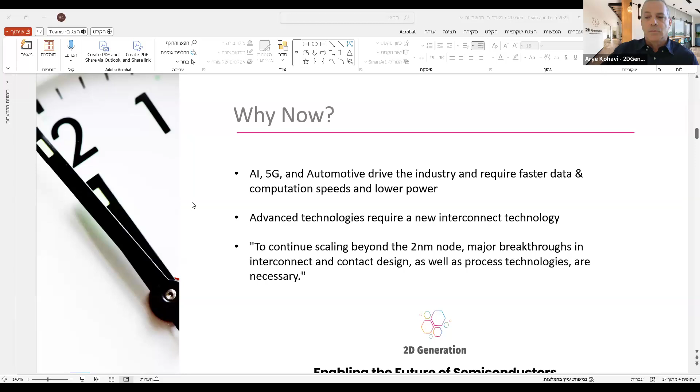Why does it matter? If the industry wants to go to advanced generation of AI, 5G, autonomous vehicles, it must solve the issue of interconnect. It's not our statement, it's a statement of the industry. In any conference in the world of semiconductor, you can hear that. This is a quote from Applied Materials: to continue scaling beyond the 2 nanometer node, major breakthroughs in interconnect are needed, as well as progress in technology. So this is where we are. You cannot go to iPhone 20 unless solving the issue of interconnect. You cannot go to the new chip of NVIDIA unless solving the issue of interconnect.

How do we do it? We decided to use a machine called ALD, atomic layer deposition, that exists in any fab in the world. In any fab in the world, you can find dozens of ALD machines. Right now they deposit metals. So we are the first and probably the only one in the world that decided to take this machine to grow graphene. How do we do it? We developed molecules that are almost graphene, and the ALD puts them on the surface, and you need lower temperature to connect them to each other and grow the graphene. This is our technology, patented in many patents.

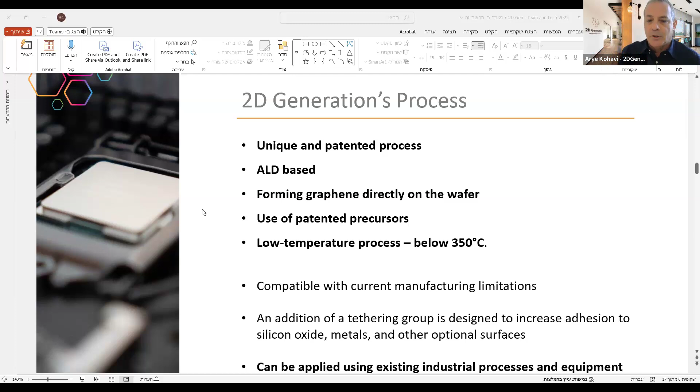So we form graphene directly on the wafer. We use a patented precursor, raw materials, and it's all a low temperature process below 350. It's compatible with the current manufacturing limitations, mainly temperature, but several more. And it can all be applied using existing industrial process and equipment. I will never design a new machine in my life. I did it several times. Here we use machines that already exist in any fab in the world.

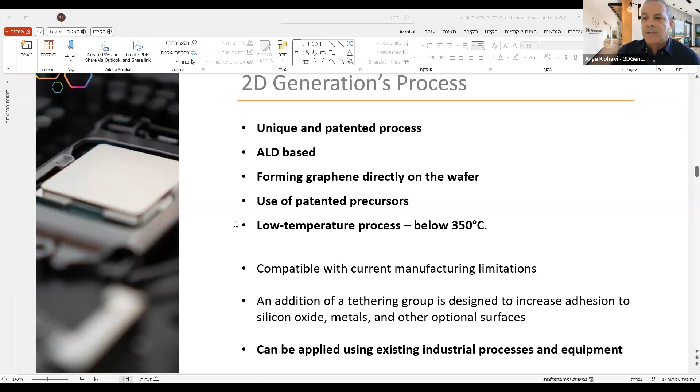As I told you, we have an agreement with IMEC. IMEC is a big organization, 5,000 researchers, and the discussion with them looks like a Benetton advertisement, people from all around the world, and they are the leaders in the semiconductor industry.

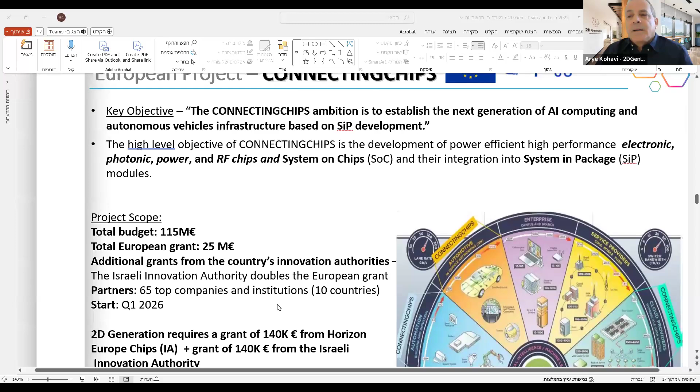Two last things, because I see that clock. One is that we were chosen for a European project called ConnectingChips. The mission is to design the next generation of AI computing and autonomous vehicle chips. Any project like that is like a speed dating when the big ones, meaning NVIDIA, Valeo, Fraunhofer, Applied Materials, sit and interview companies that can bring solutions, they define their gaps. One of their gaps was graphene, and then they interviewed all the companies and academies that try to show a solution, and they chose us to bring graphene to the project. It's a project that's going to start next year, but we were chosen to bring the graphene to this project.

Last thing, we have 4 patents. Each one of them covers a very wide area because we are the first and only in the world that uses ALD for graphene. We could submit a lot of patents around that.

So this is what we're doing. Last comment is that probably I'm going to arrive at Semicon Taiwan within a few weeks, so I can meet you there.

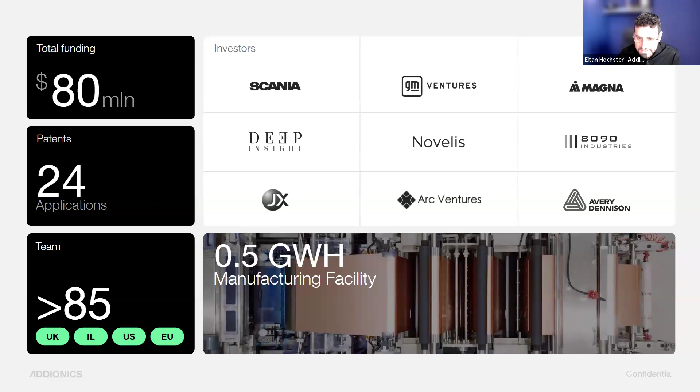So what is it exactly that we manufacture? We have a technology for manufacturing current collectors. Current collectors are a key component in the batteries. They are the metal substrate that holds the electrodes together. Today they're 2D foils. It's a standard commodity, something that's been overlooked. It hasn't changed in the last 30 years since the lithium-ion battery was invented. It's often known in academia that it's not optimized. There's a better way to make these current collectors that, if you can improve them, you can improve the whole battery because they influence the structure of the whole electrode.

People focus on the chemistry of the battery, but actually the physical structure of the battery has a lot of untapped potential for improving the battery. So what we have done is we've taken this concept, which was known in academia, and figured out a way to manufacture it at scale: a porous and three-dimensional current collector. So in every current collector, instead of being a flat piece of foil, it is three-dimensional and porous, meaning there's less copper and less aluminum than there normally is in every battery. And there's a more mechanically stable electrode because you have better structure and more surface area.

What this ends up happening is, one, it's cost effective. We can reduce the cost to cell manufacturers by up to 10% per kilowatt hour. We can make batteries that get rid of traditional trade-offs, where usually if you make a high energy dense battery, you're going to have lower cycle life, or if you make a high power battery, you're going to have worse energy density. We can reduce those trade-offs.

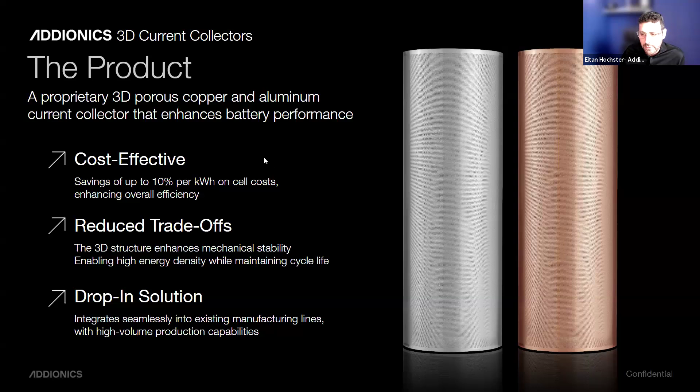And finally, and most importantly, it's a drop-in solution. We're taking something which is the backbone of the battery manufacturing process. A frequent question is, okay, if you drop in your technology, are we going to have to change our manufacturing lines? And that's not the case. We've proven with automotive battery partners that they can take our material, drop it into a gigafactory line, and still keep all their other processes the same.

So I can show you a very short video here of our first current collector manufacturing facility, right in the middle of Tel Aviv.

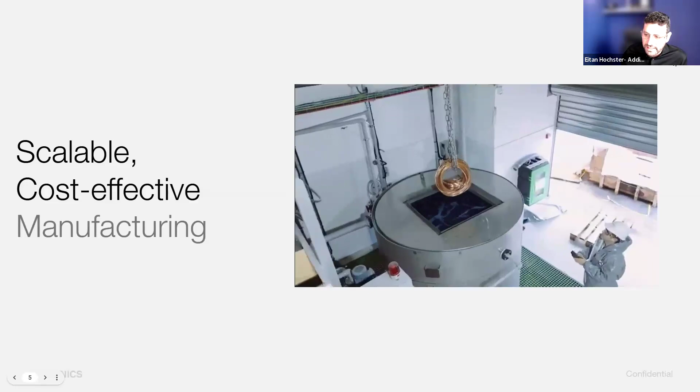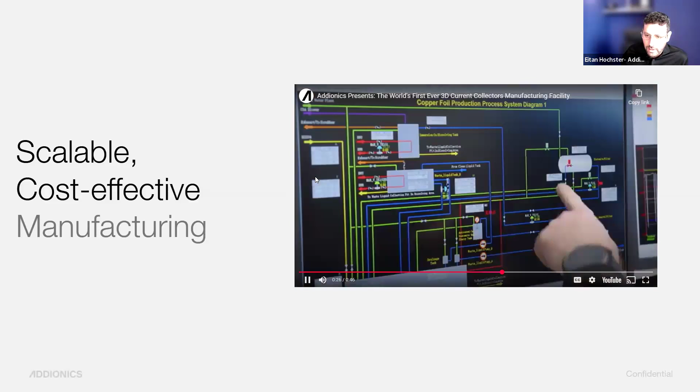This is a 0.5 gigawatt hour facility where we have taken state-of-the-art technology and scaled up to the point where we can drop in our technology and build gigafactory scale batteries. So this is a small scale production facility here in Tel Aviv. You're all welcome to come and visit and see it in real life.

Again, this is a manufacturing facility that we have recently scaled up and brought online this year. It is 0.5 gigawatt hour of capacity. We can make production up to 700 millimeters wide, so more than 0.5 meter. Ultimately, this is our process for validating the technology, not at lab scale, not pilot scale, but using full commercial equipment. We're the first company to develop and scale a material like this, and we've demonstrated fully that it can be scaled to our next factories, which will be much broader than these two lines.

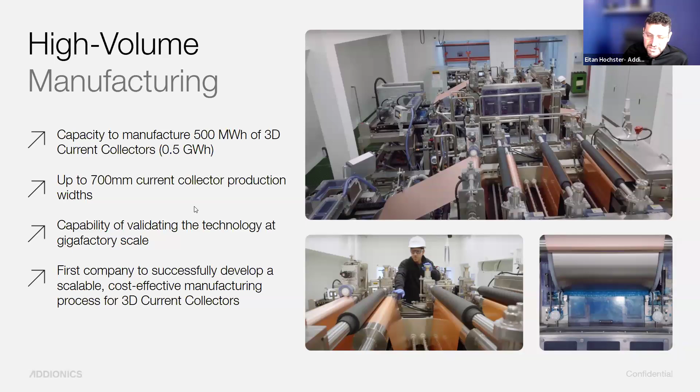As I mentioned, a key factor and a key barrier from the beginning of our company was, is it adaptable to standard gigafactory or battery manufacturing processes? Again, we've proven that is the case.

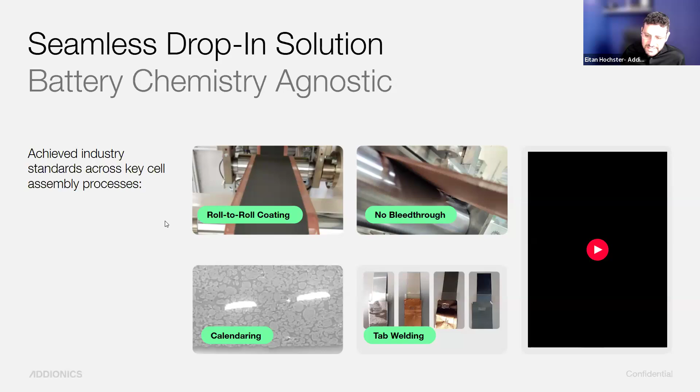People have worried about whether you can coat it, whether you can do tab welding, all these specific processes of batteries. Again and again we've shown we can drop in and easily adapt the battery manufacturing process to our next generation technology. In the battery industry, there have been a number of struggles over the last years in terms of battery companies scaling.

Frequently it's hard for companies developing new chemistries to go from synthesizing small batch chemistries to all of a sudden large volume, because we're doing manufacturing with more physical properties, we're not synthesizing new chemistries, we've been able to scale at a much faster pace. And because we're not changing the electrochemical nature of the cell, we're still using copper and aluminum just like companies today, there isn't the same safety and risk and scale-up risk that you might have with new chemistries.

So we've been able to scale beyond R&D scale quickly. We don't have some of the trade-offs that normally come with new chemistries, where you might have new technologies for anodes, but they don't solve the cathode, or aren't adaptable to both the anode and the cathode. And finally, as I mentioned, we're fully adaptable to standard manufacturing processes.

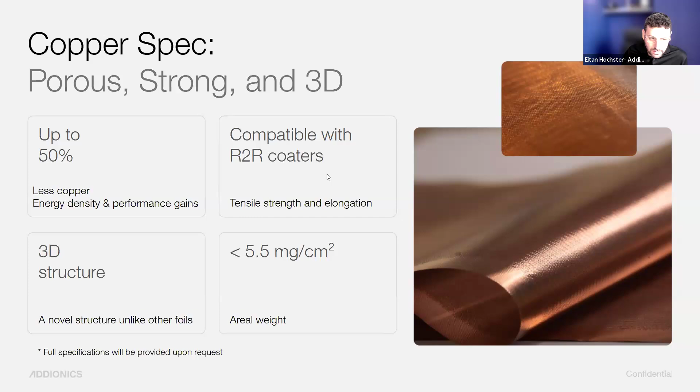So this is a bit of what our material looks like up close. You can see it's porous, it's strong, it's also structured and three-dimensional, so lower weight, lower volume, but higher surface area than what you have today in batteries. A little bit about our technological benefits, and then I can wrap up.

Again, this material is the substrate that you coat your chemical material for the battery on. So what's really important is your electrode adhesion, which ultimately improves your mechanical stability.

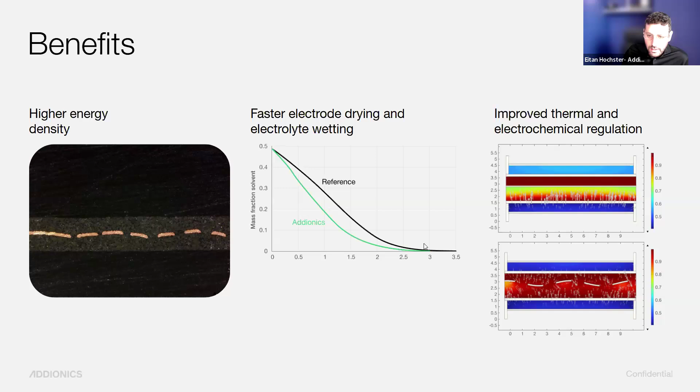Here you can see some other benefits: higher energy density, better manufacturing times, lower temperatures across the cell, which is really valuable in high power applications, and a more thermally homogeneous electrode. Cell overheating is one of the big costs that goes into pack building, so if you can reduce overheating, you can solve a lot of challenges around scaling up batteries and lowering their costs.

We have these offerings today. We're scaling up both for standard chemistries like NMC and LFP, but also for new technologies like dry coating. So thank you very much, I look forward to your questions and furthering the conversation.

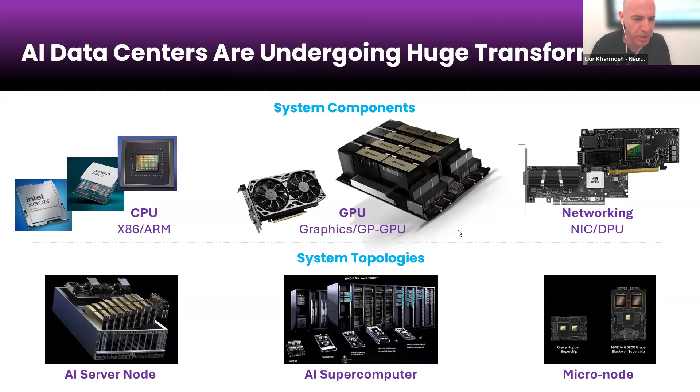So we see that the system becomes hefty, with stronger GPUs, more CPU processing and networking, and AI-specific networking. The trend is toward AI-dedicated hardware with dedicated resources. Performance, bandwidth, and latency are never enough for these systems. And since it scales up very high, with specific racks using a lot of power, efficiency and how it's done properly affects a lot the TCO, total cost of ownership, which is cost and power.

So the problem is that today the unit economics of the AI business is broken. If we look at regular cloud infrastructure, we see a healthy market. We have infrastructure with relatively hefty, reasonable margins based on semiconductors and apps that make money out of that. The generative AI market is opposite. It's focused on infrastructure investment. We can see that most of it is at this level, and at the application level, they don't make money.

And the reason is that the cost-power ratio is not effective, and we can see that here. The thing is, to serve all these AI use cases, the GPU evolves heavily with Huang's law, meaning it doubles its performance every year. While the CPU used to follow Moore's law, today it's not keeping up. So the gain is like only 10%, and it creates bottlenecks.

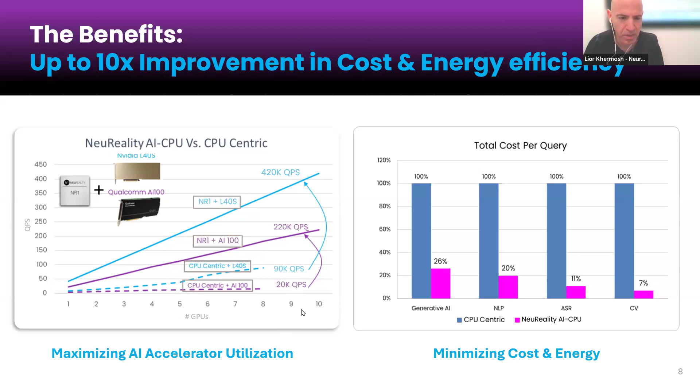So all of that Lior, provides... you have 2 minutes. Okay, so all of that provides a 10x improvement in processing. So what are we doing today?

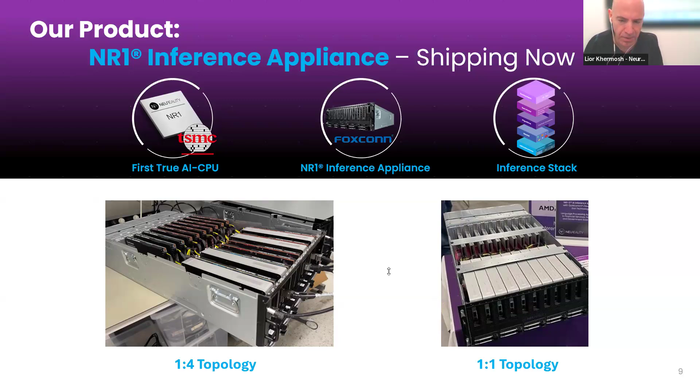Today, we're shipping already an inference appliance with Qualcomm AI100, and we work also with AMD and IBM. This appliance comes in 2 formats, one with 4 accelerators, 4 NR1 and 16 accelerators, more optimized for LLM, and one with a 1-to-1 configuration for computer vision. And we deploy that already in CSPs and enterprise from first tiers, and with POCs in additional different companies.

Where we are in this journey: we started with the development of the system and end-to-end building prototype, and then partnering with our ecosystem companies like Qualcomm, AMD, Lenovo, Samsung, IBM. We did the chip, we're manufacturing it in Foxconn. Our NR1 is 7 nanometers manufactured in TSMC. And we're now deploying CSPs in top 5 financial institution in US, and we're in POCs in strategic companies.

And we're now working and providing LLMs based like DeepSeek, Llama, known LLMs in a fully optimized appliance. And we're working on our next generation to reshape the future, our AI CPU technology, to provide training and inference, increasing our processing capabilities, and going forward into the evolution of the market with the AI evolution. Thank you.

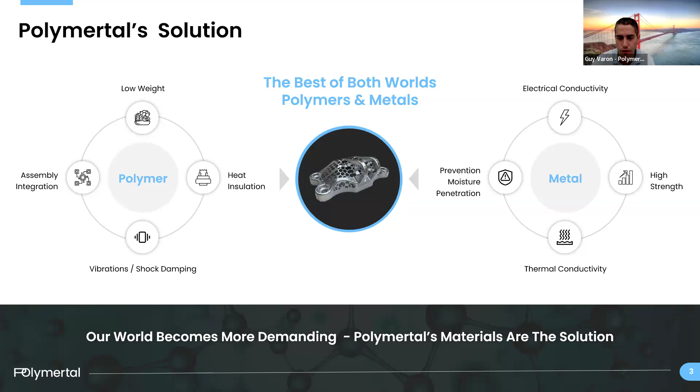And that's where we come up with the solution of Polymertal, which is combining the two worlds of polymers and metal together. From each type of these materials, we take the best features. From the polymer, we take the lightweight, the vibration shock damping, heat insulation. And from the metal, we take mainly the electrical and thermal conductivity, and the additional strength that you get from the metal, and preventing of moisture penetration. These two materials put together, as a type of composite, creates the best of both worlds into new types of products and next generation of products. The value proposition of the company is pretty simple.

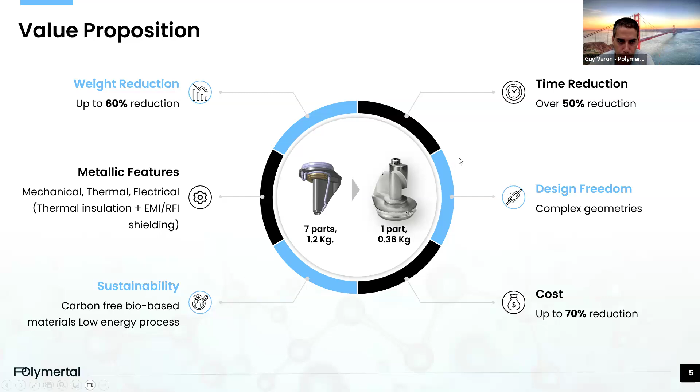First and foremost, we are a weight reduction opportunity, moving from metal to our type of materials which combine the polymer and metal together. We're able to save about 60%. We enable the metallic features such as mechanical, thermal, electrical, and conductivity. A lot of EMI RFI shielding done with these types of technologies, along with a sustainability approach using carbon-free bio-based materials, and the entire production process is a low-energy production process, so it becomes very sustainable. And we can also use additive manufacturing to create lightweight and complex designs, and to do it very fast and at an efficient price.

In this process, we do not use any primers or glue. It's a pure chemical and electrochemical process that creates excellent adhesion between the polymer and the metal layer, which can withstand different types of conditions. We've done this for a very long time, so we have experience with a lot of different polymers.

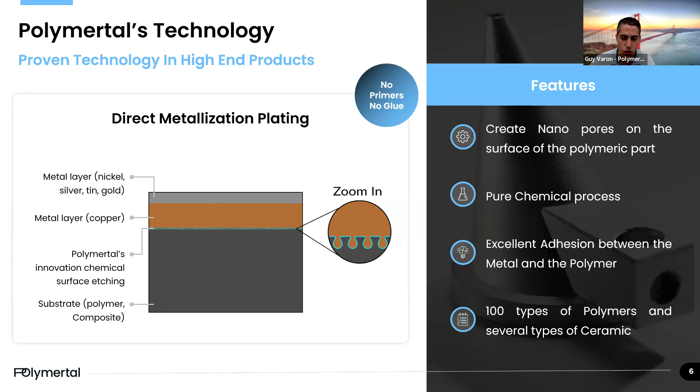We also do what's called waveguides in the RF segment, for 5G and radars. The main capability here is doing internal plating of very complex structures, with a very high frequency and a big range. In addition to that, we have aerospace and satellite antennas. This is a bit more of a niche product range, but it comes up every once in a while. We're working with some big companies like Schaeffler, Continental, ASML, Thales Alenia, Porsche on these types of projects.

Eventually, I want to show one of the global case studies, an ECU cover. That's the engine control unit of the vehicle. This is a project that we've done with Schaeffler.

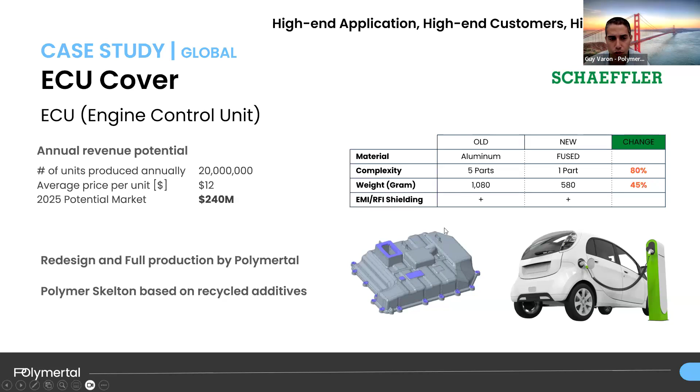So this was a fully redesigned and full production by Polymertal, and this is something we're working on. This is like a typical project that we work on in the automotive sector.

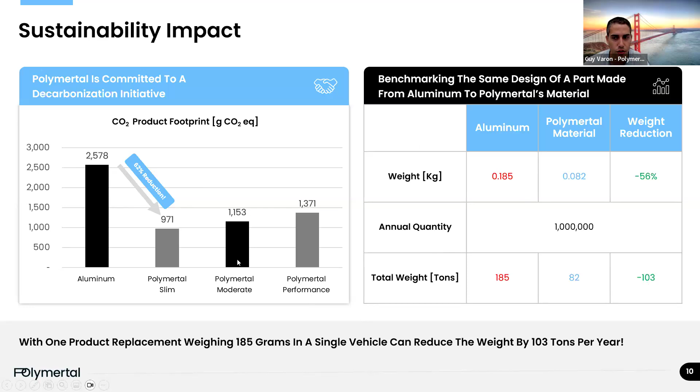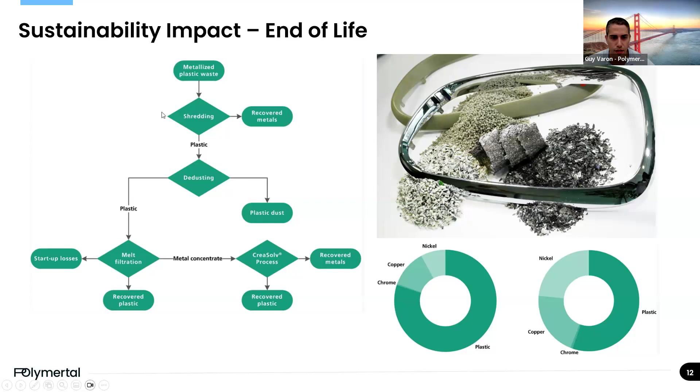We also have a sustainability impact at end of life, meaning we're able to eventually recycle the products through a process of separating the metal from the polymer, through a type of shredding process and recovering the metals and polymers. I will not go into that too much due to time.

The company is today located in Haifa, Israel. We were founded in 2013, have about 36 employees, and revenue of already $4 million per year. We've also achieved a Horizon 2020 grant. We're currently at the stage of global growth. We have a future site in Israel that we're moving to by the end of this year, a much bigger production site that will enable us to do high-volume production.

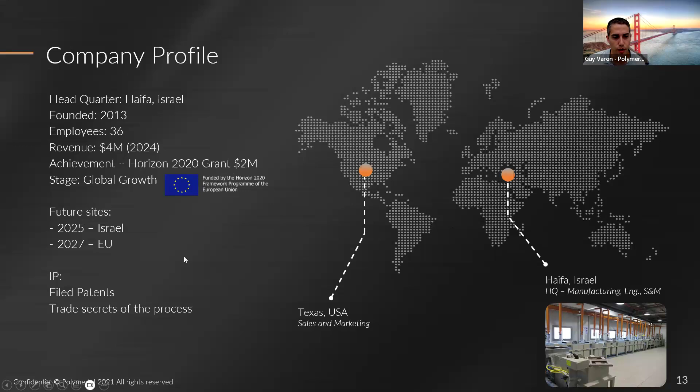So our market is the metal alternative market, a $200 billion market, and it's a global trend in the automotive and aerospace type of industries. This is a market that is growing year over year significantly. We're already a serial production manufacturer with our technology and validated at TRL 9.

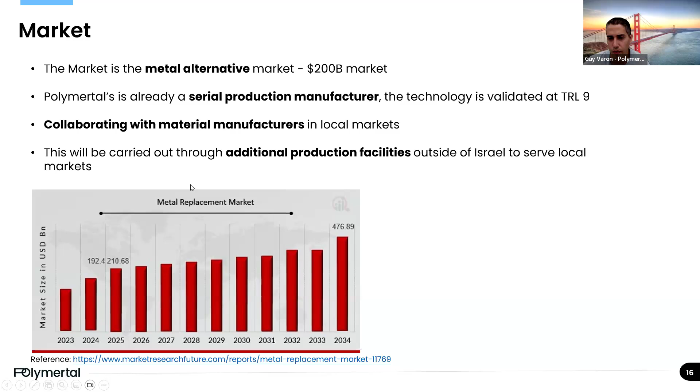Our main collaboration opportunities in the local markets are with material manufacturers or with end customers. So generally, our strategy is to have additional production facilities, either our own or through partnerships outside of Israel, to serve the local markets.

We're currently looking for a Series A of a $10 million investment. The main idea of the investment is to expand our global sales and marketing team and activities abroad, and as well to increase the manufacturing capacity so that we will be able to manufacture more and more products.

Mainly we're in the stage of global scale up and growth in the US and EU market, which are our current biggest markets. And we're seeking investments and collaboration mainly with strategic companies operating within the field of polymetal, such as in automotive, aerospace, and semiconductors.

Up till today, we raised about $7.5 million, and the rest is coming from our recurring revenue, which is growing about 40% year over year. That's about it. Thank you very much.